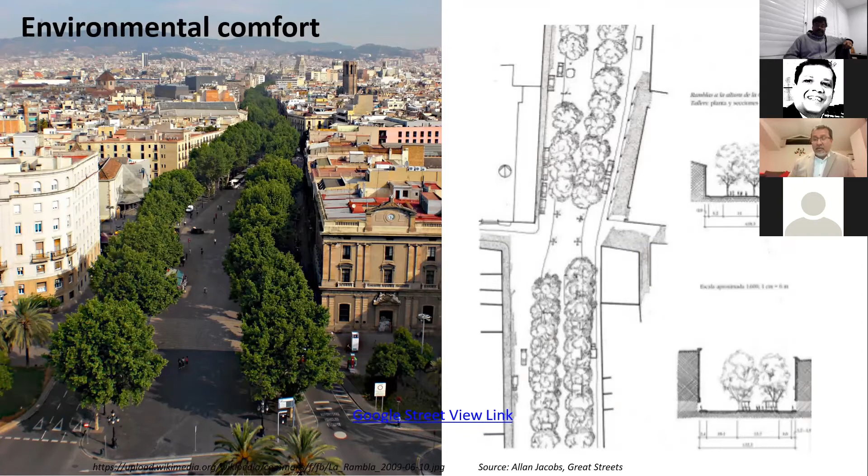So in these times and days, designs can be manipulated. So you have to look at what works in the context, and how do you go ahead and design these high environmental comfort spaces in your precincts, really putting together an urban design brief, and the solutions can be many.

In access and amenity, I talk of the ease of access, the permeability, so that you do not create super blocks, and you have ability for people to have free seating. So there's adequate places for people to lounge and sit without necessarily

paying for it. And privately owned spaces require you - privately owned spaces do not allow you to lounge around, and they look at the way, what clothes you wear, and what kind of footwear you wear. So if that is a part of open spaces, it actually excludes a lot of people.

And I think you really have to go ahead and create places that are truly public. It does not matter who you come from. Especially in the subcontinent, there are other complications of social stratums who comes in and out, but public place is truly public. Everybody has the right to be there. And that should be the fundamental underpinning of any design that you do.

And who affords it, how you do it - there is a relevance for private space, privately occupied space, like outdoor dining, etc. They do go and bring a lot of value, but they should be in reason.

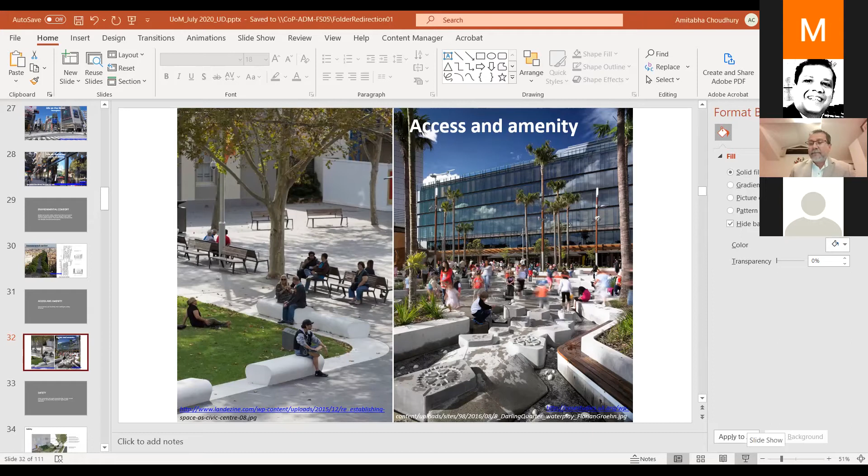Okay, so I'm sure you've encountered the topic of crime prevention through environmental design, CPTED for short. This was work done in the 1970s in America, looking at strategies to reduce crime by having more surveillance—people looking out, essentially meaning more eyes make it safer.

Now, in denser environments in Asia, this probably isn't as much an issue, but that said, the way we are urbanizing, the building forms we are creating, gated estates, etc., we seem to be picking up not necessarily the best examples from the West in terms of urbanizing our cities.

So it's important to create cities which have traditional surveillance, where people on the street can watch what's happening. If something goes wrong, there are people to help or report it, making sure the place becomes safe—especially in residential areas and neighborhoods where there are children about. That makes for safer places.

As I said, the Asian case is a bit different—there's less of this stranger danger perspective. Given the low densities in the West, one product of low density is also lack of safety. There are two ways of dealing with it: you make it a state matter and put in a lot of surveillance, or you design cities that allow this naturally.

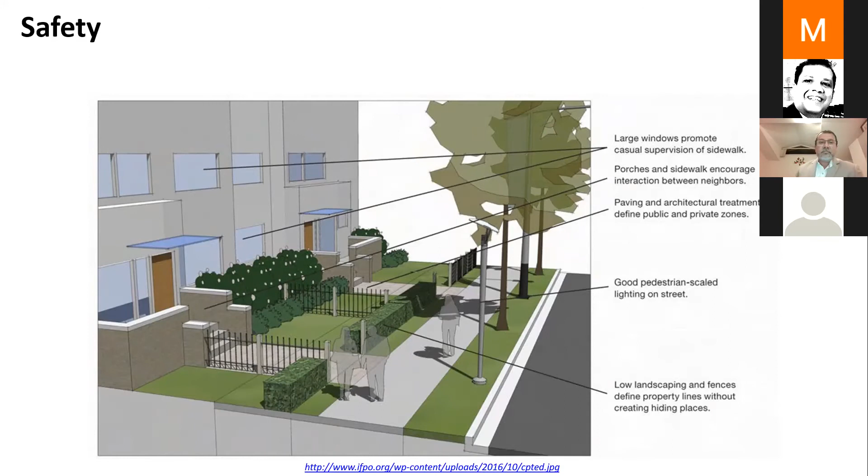So again, summarizing what makes a place successful: context and character, life on the street, environmental comfort, access and amenity, and safety. How am I doing for time? I think I've been speaking for half an hour. Do you want me to continue?

Sure, yeah, right. So I might just skip over the CPTED bit because it's very specific to safety and looking at what makes for safer spaces—they're self-explanatory in terms of making sure there are distinctive, clear entrances. One thing I'd like to mention, which is often mentioned in architecture school, is the semi-public space.

There is no such thing as a semi-public space—it's either private or public. You may have a yard that you share as a landscape asset, but anything that lacks clarity in terms of ownership is likely going to be squatted on or abused.

So do create spaces that allow for that buffer, but a piece of development, at least an urban element, has to be owned by somebody. If it has no definition of what works and what doesn't, who owns what, that's a recipe for disaster. It should be very clear what is owned by the public and what is owned by the private.

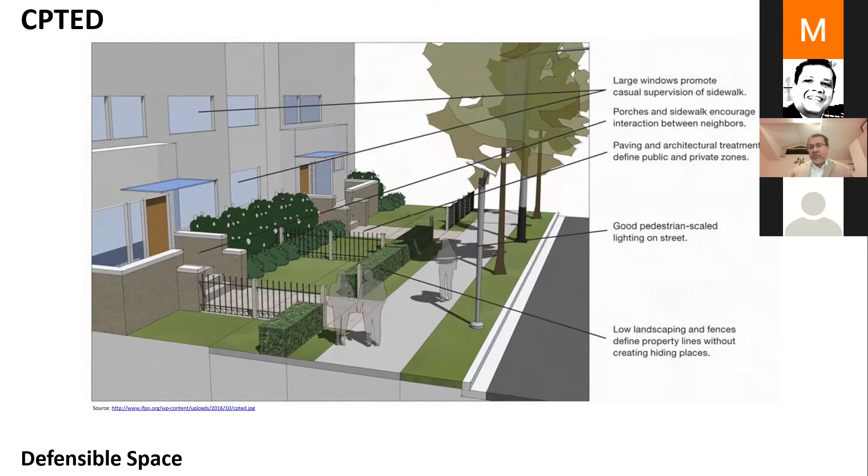So, but I think it's important to look at safety from that perspective, and as I said, I won't go too much into it. The other thing is designing places with opportunities—eyes on the street is important. And another thing is having a mix of demography for better safety.

Okay, the next is blank street walls, poor image and isolation, and the importance of CCTV in the future to come, because natural surveillance is not quite cutting it. So you will find cities relying heavily on CCTV for safety and security.

Importance of appropriate night lighting, using activity supports. Brighter lit spaces tend to be safer at night.

Looking at activity support when you have large areas which are unsurveilled, look at putting in support uses where people can go and buy a bus ticket or something, so there are people on the streets seeing who is going around. This is probably more of a Western criteria, but the way we are urbanizing and creating suburbs, middle-class suburbs, this might become a requirement soon.

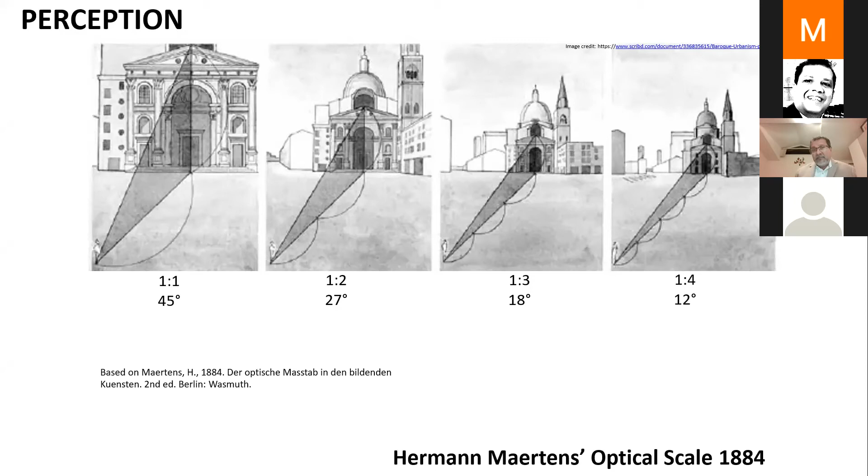If you step back twice as far, you get to see the bigger context. Further away, three times as far, you get to see even more, and four times you get a more panoramic vision. This is important in the way you design the scale of spaces and what you get to see - it's the social field of vision.

So you're designing for people on one hand, for close interaction. This is Jan Gehl's study that looked into how people interact, and how the Danes have actually picked it up and used it as part of a lot of their place strategies.

I'll skip along - there's some theory embedded in terms of activation, looking at how you handle blank walls, etc., and how many doors per 100 meters you put in to get better levels of activation. There are some rules about European cities and how they activate, and it's a bit different on the subcontinent. So I would ask you to use your own filters in coming up with these standards.

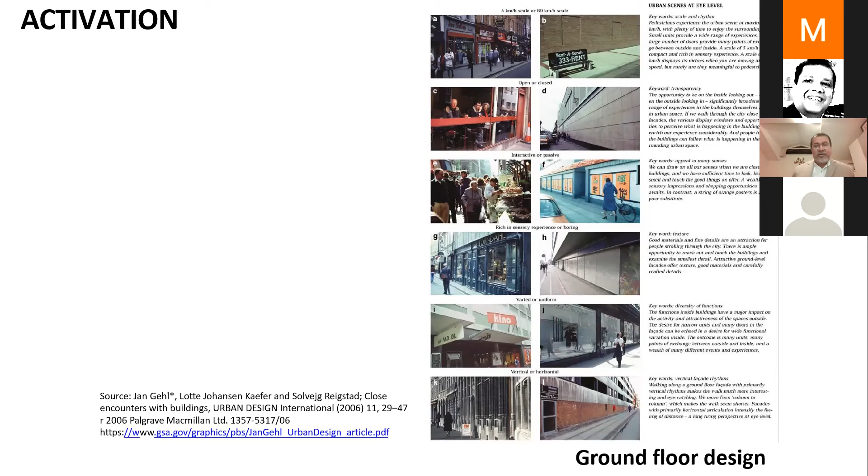You do get these tall towers and landmark buildings, and you'd find a lot of the development community says, my building is the landmark one. So according to that, every development is a landmark. Landmark is not about buildings, it's often about spaces and about not having buildings, or it could be an open space, it could be about what people see. Keep that in mind, because right now the focus about making cities seems to be a monoculture of towers. And towers are important, needed to accommodate a lot of growth in cities, but it isn't the only model. It's important to look at what is experienced from the street, what does it do, does it allow enough light and breeze, the heat island effects, and other things.

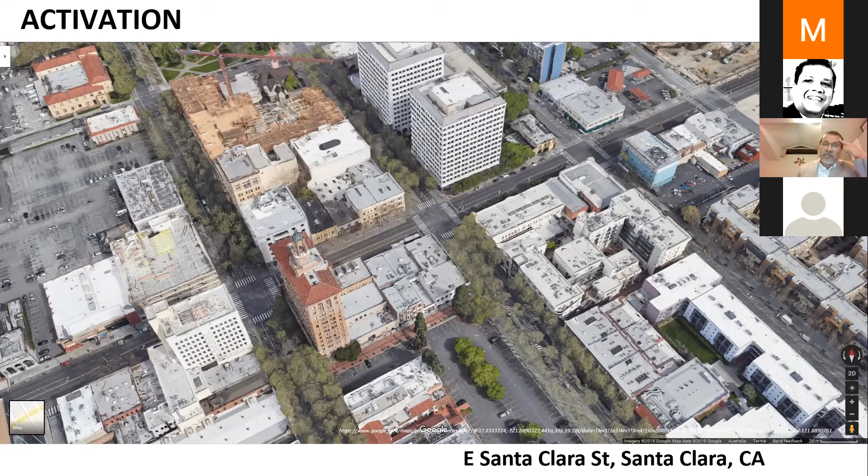One of the things you have to look at about activation is, if you want a street that works well, it should be affordable for retailers to occupy it. If it is really high rents, what it creates is very high-end shopping centers, and it excludes a lot of people. So a high street that works well has a range of users, from the high end to the middle end, and also some smaller shops. That's where secondary and tertiary streets are important. The primary streets have the higher retail addresses.

The secondary streets have less, but the smaller lanes and finer grain development. That's why these fine streets are important, because then you can have smaller retailers on the back streets and still be in close walk from the main streets. Right now, of course, because our focus is on traffic movement, everything is loaded onto the movement corridors, and therefore both the formal, informal, and other streets go and locate there.

So it's important to look at opportunities for this range of businesses to happen. Sometimes cities do need to think creatively, that you should be able to subsidize rent in some areas to allow other things to work. I don't know how much of a reality this is. I think real estate tends to be regulated very differently all over the world. So it's important to keep in mind that if you're creating a spanking new building, it also means the retail tenancies on the ground floor that you're hoping to activate are going to be very high.

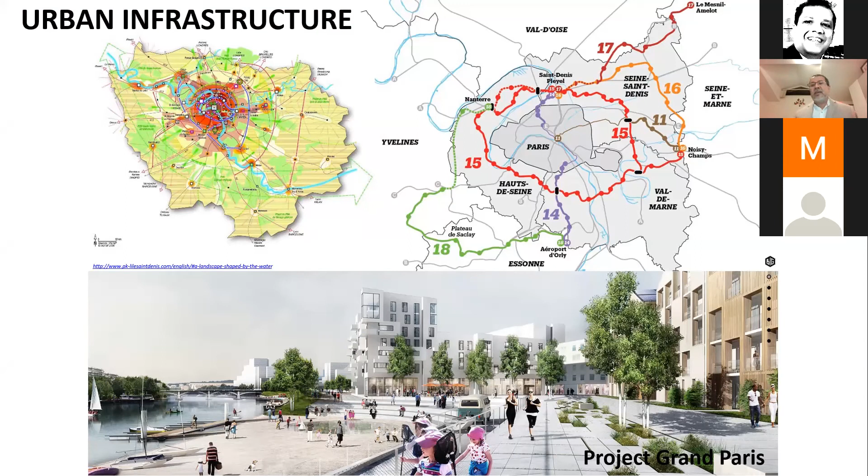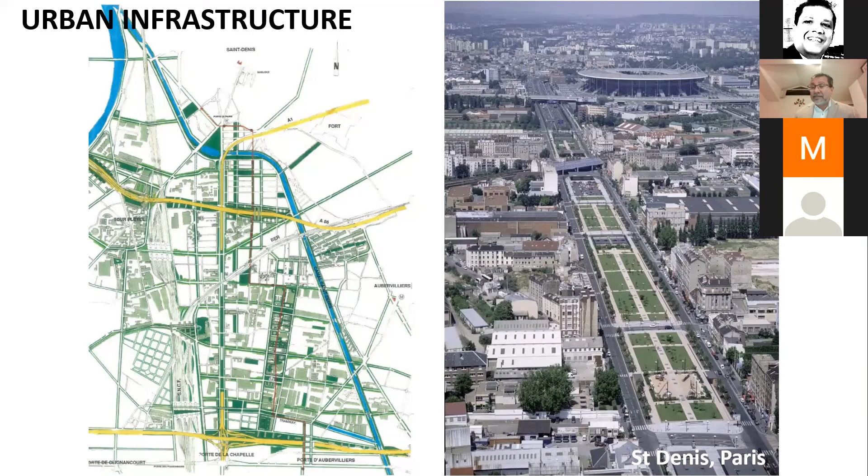In this case, this is the Stade de France in Saint-Denis, which was a kickstart. The World Cup was held there. They put in a lot of major cash injection into what was a really rundown area of Paris, and they did manage to improve the urban amenity and quality of life there.

In certain instances, events like the Sydney Olympics had an environment theme. A contaminated wasteland was made into a showcase to be demonstrated to the world. Normally you don't need to do it, and these Olympic sites are literally white elephants nowadays, never cost neutral, and you spend more money, but it is done more for kickstarting these large urban infrastructure projects, because that allows the government to invest.

London had the same thing, where it went ahead and invested in former industrial land, with production being outsourced elsewhere. These were often fallow lands and they were redeveloped.

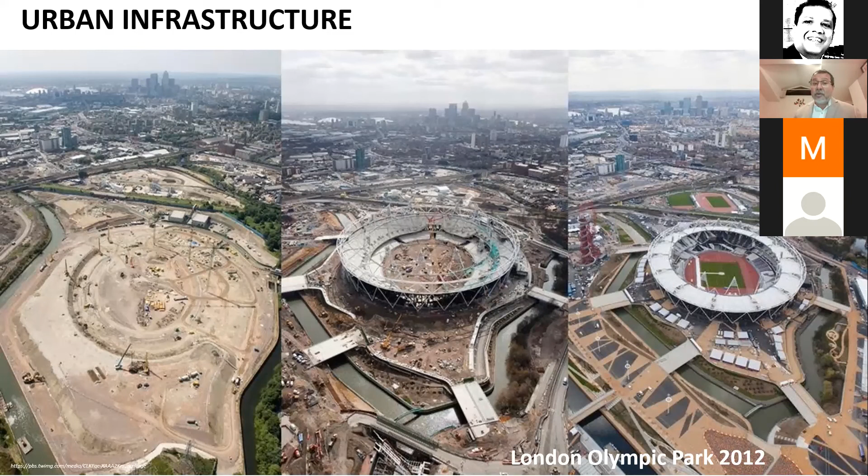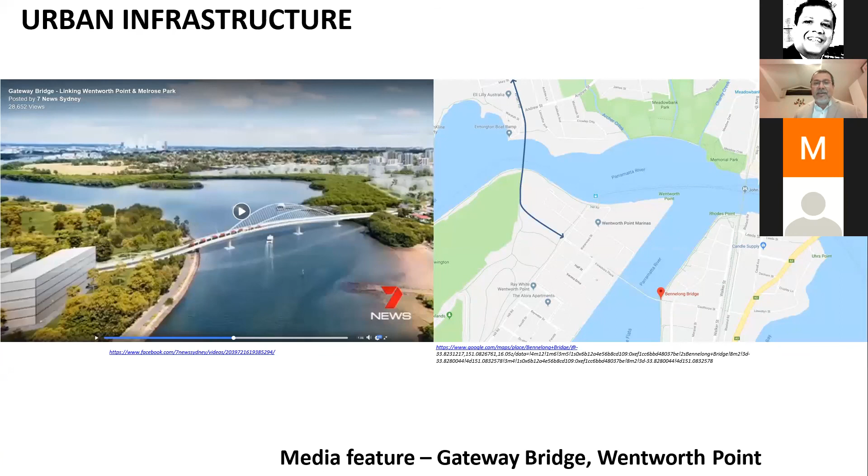Looking at the opportunity, this is an example I put in of a development in Sydney, where the developers were required to put in a bridge. As a result, it created an enormous amount of 2,000 more dwellings in order to afford the bridge. So this is something you have to keep in mind, that private sector developers are not in the business of nation building.

You have to keep in mind that you really need an infrastructure policy that is independent of small, petty interests or development. Let the developers do their job, let them build their buildings. But when it comes to large infrastructure, it does need a bigger infrastructure strategy.

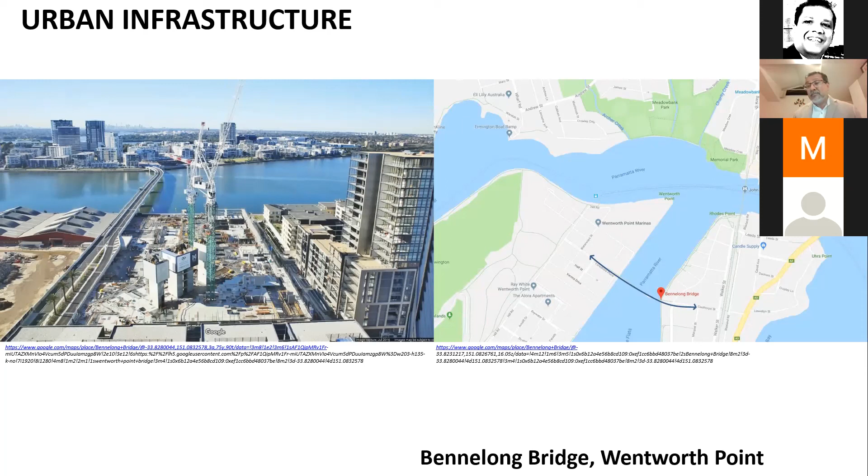Also planning for flood resilience. I don't know how acute it is in Sri Lanka. I imagine in and around your case study areas, being coastal areas, there would be some impacts. This is an example in Sydney, which is in a flood basin, and that shows the impact of not planning for flood.

In this case, they have planned for flood, but the retail edge is nearly 1.5 meters above the ground. Accessibility is impacted, a substation can short if the water level rises, there are issues with emergency evacuation in case of flooding, and there is higher insurance premium because of the increased risk of flood.

This might be a first world problem, but it's going to impact a lot of inner city urbanizing areas using similar models of development. So this is something you have to plan for, and it's important to have a more comprehensive flood management strategy as part of your briefs upfront. The City of Helsinki has already introduced some guides on prevention and control of floods.

The other thing to keep in mind is planning for heat resilience. As you put in higher and taller buildings, the generated heat gets trapped in. Look at opportunities for increasing urban tree canopy, shading and passive energy techniques, putting in cool roofs and materials, and green roofs and walls where relevant.

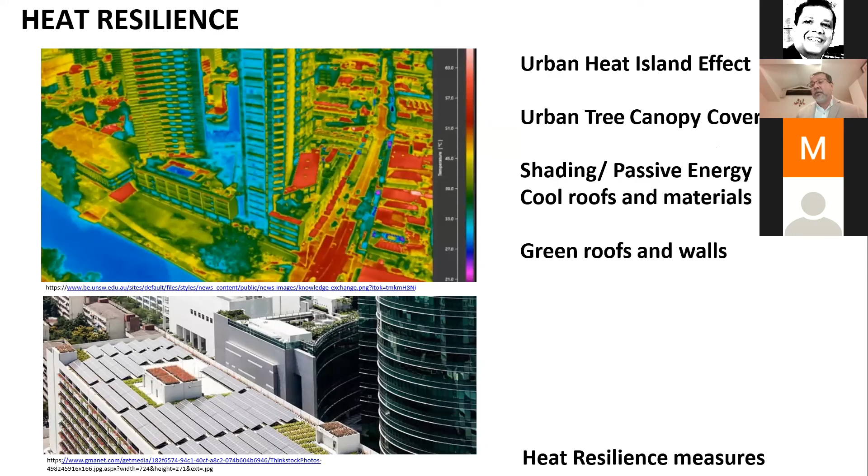But these green roofs and walls are very expensive measures, so often by planting a tree you manage to mitigate a lot of the issues. So allow space for trees to grow in your cities. Heat resilience is a topic you have to keep in mind, and it is impacting a lot of cities all over the world.

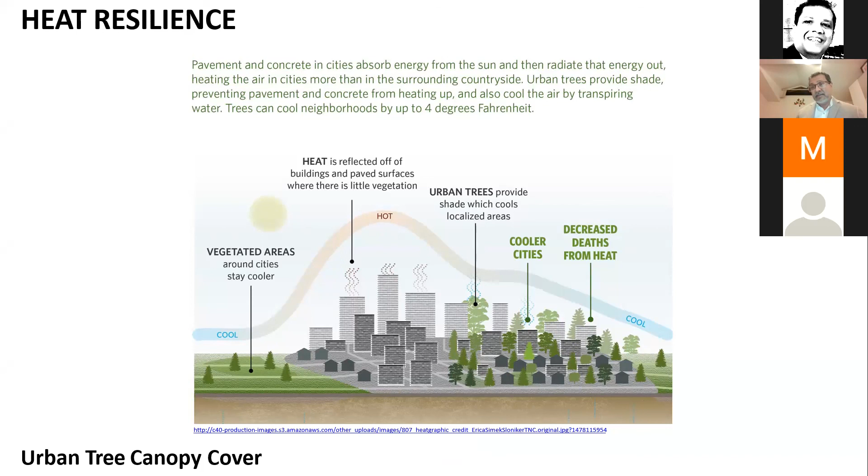Also planning for urban resilience. The Singapore Master Plan is one of the best examples, in the sense they've kept to it since 1959. The problem with a lot of the world is that master plans are made and shunned. I think having a bigger plan that you stick to is very important for the well-being of a city.

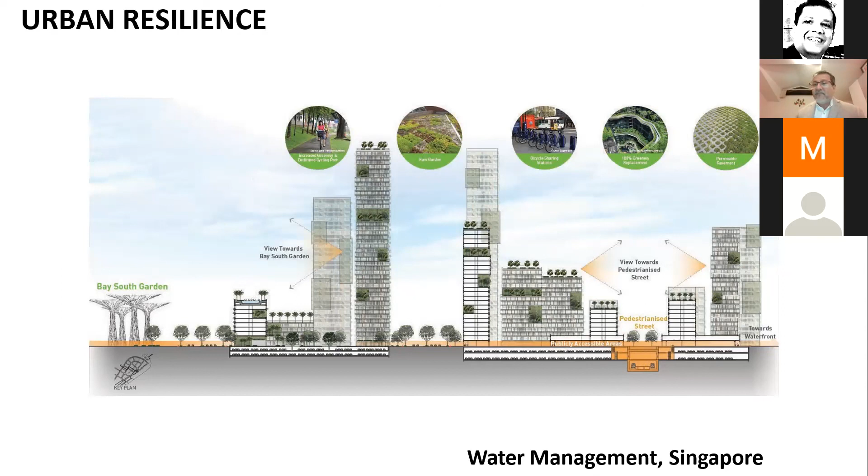Otherwise, piped water would have to be brought in from Malaysia. So planning for it at a national level, in this case a city-state, probably has some relevance to urban design.

Now that I've done that, from my view as a tourist, I wanted to put in these themes you need to look at in terms of the narrative. I did a very quick summary with a quick capture trawling the net. This was a study done by Cornell University looking at traditional vernacular narratives, the thatched rural dwellings. All of us do these in our first years, capturing what is a sense of the village form in our environments.

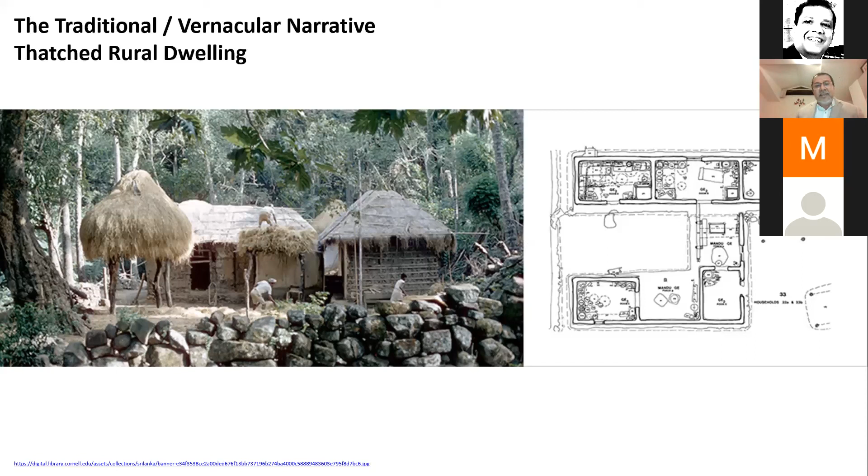And then, of course, you have the vernacular narrative analysis. It's from a very design-centric point of view, looking at the sacred and the profane. These are important aspects.

The other modern vernacular narrative is often much more prosaic. It tends to be about functionality, looking at how you work with the land and what briefs you have. Sometimes in this peri-urban area it's quite green and lush and okay, but it also has, in the subcontinent, many instances of slums and over-densification. So that's something you have to keep in mind.

So what are the narratives of significance? What do you take home from this information? The other is the colonial narrative, which nowadays has either a love-hate relationship, where colonization is seen as not good, or it could be seen as heritage. So you need an understanding of how it works in the current context.

Also, in terms of design trends, the modern architectural narrative often shows buildings in space, or contained courtyards, with very limited engagement with the street or public spaces. They often tend to be a Palladian villa surrounded by a garden with high levels of greenery shrouding it. But that is a fairly anti-urban approach.